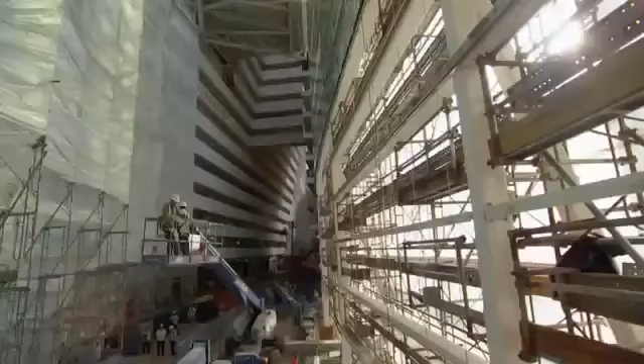It's the country's first casino, 3 skyscrapers covering 9 million square feet, and topped off by an engineering masterpiece, the first ever Sky Park. Longer than 3 football fields, with gardens, swimming pools, and restaurants, all higher than the Seattle Space Needle. We're actually in the pool right now. We're in the pool. This is the view from the pool. Wow. It's pretty spectacular. That is amazing.

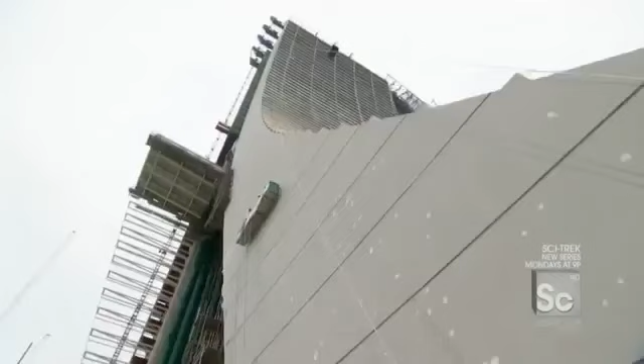To finish it, crews must perform some of the highest and heaviest lifts ever attempted. I mean, you're putting a piece of steelwork the size of an aircraft carrier on top of 3 towers. Tackle one of the largest paint jobs on the planet. You would never do this in America. And erect one of the longest cantilevers in the world. 200 feet out over nothing. Oh my God, that's enormous.

I'm in Singapore, a tiny island nation with less than 5 million residents. In fact, the entire country is smaller than all of New York City. Located at the southern tip of the Malay Peninsula in Southeast Asia, the main island of Singapore is both a city and a country, one of the most densely populated in the world.

Culturally speaking, it's a somewhat strict and buttoned-up environment. Chewing gum? Against the law. Insensitive behavior is punishable by fine. And if you're caught vandalizing a building, you quite literally get hit with a stick. But despite this conservative cultural backdrop, Singapore is attempting to reinvent its image by doing something totally surprising. They're going to open a massive casino.

With no natural resources of its own, Singapore is risking $5.5 billion in hopes of cashing in on the gambling boom exploding across Asia. It's a pretty significant gamble because for Singapore, you've never had gaming before at this scale. You've never had a resort at this scale. Yes. You're taking a kind of a major leap. Yes, it's certainly a transformational project for Singapore. Where you hope to actually not just double, but triple the tourism receipts. That's big.

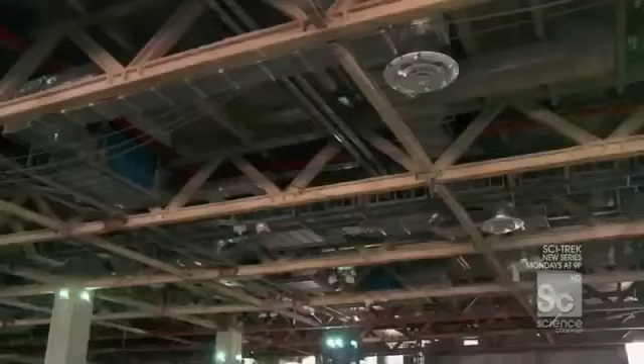The centerpiece of this giant transformation, the Marina Bay Sands. One of the biggest and most expensive casino complexes in the world. Unlike any hotel and casino ever built. Rather than just being a traditional hotel and casino that we might find in Vegas, instead, we have a museum, theaters, retail, a casino, a massive convention center, 3 incredible hotels, and all of that capped by the first ever Sky Park. That is absolutely right. The Sky Park on the very top will become the icon of Singapore, we think.

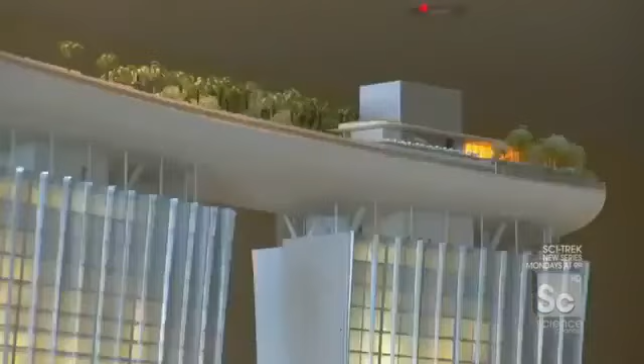In a move that has never been done before, world-famous architect Moshe Safdie put a park across the top of 3 massive skyscrapers. An 1,100-foot-long urban oasis with tropical gardens and one of the longest swimming pools on Earth. All of it perched 55 stories above the ground.

So, Brendan, how do you describe a Sky Park to people? I mean, it's just a fantastic structure. I've never seen anything like it. There's 3 55-story towers, and you're putting a piece of steelwork the size of an aircraft carrier on top of it. So it's quite a feat. And there's a park up there. There is. Well, there's more than that. There's observation decks and swimming pools and restaurants and all sorts of things. So it'll be a little city in itself.

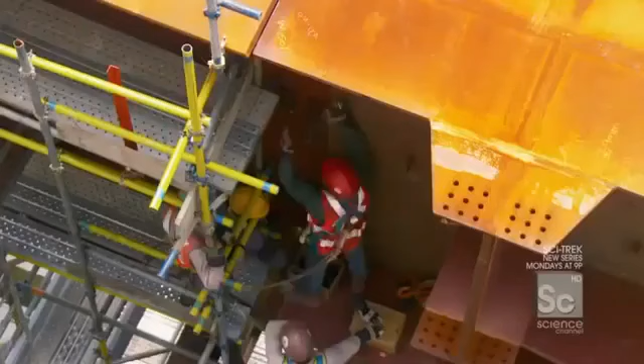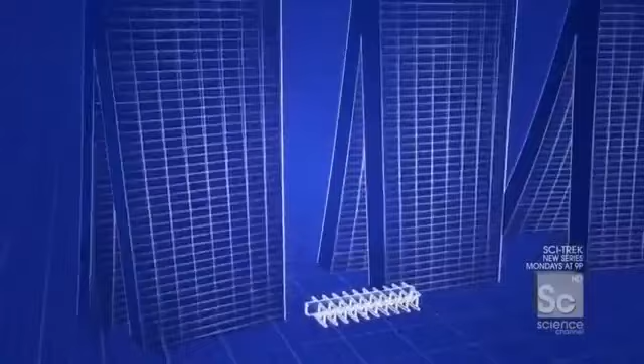The biggest challenge for builders, lifting 7,000 tons of steel, which is more than the main span of the Brooklyn Bridge, on top of 3 650-foot-tall buildings. To get it up there, the team divided the structure into 14 large but more manageable segments. 6 form the bridges connecting the towers, and the other 8 make up the observation deck, which sticks out 218 feet from the end. And right now, crews are about to lift the second-to-last bridge segment, a massive 350-ton piece that will hang between towers 2 and 3.

It's a little after 7 p.m., and on most job sites, it'd be quitting time, right? Folks would be going home. But here in Singapore, we're about to begin one of the most critical lifts in the entire project. That bridge segment right there, an over 350-ton chunk of steel, is about to get lifted up over 650 feet in the air.

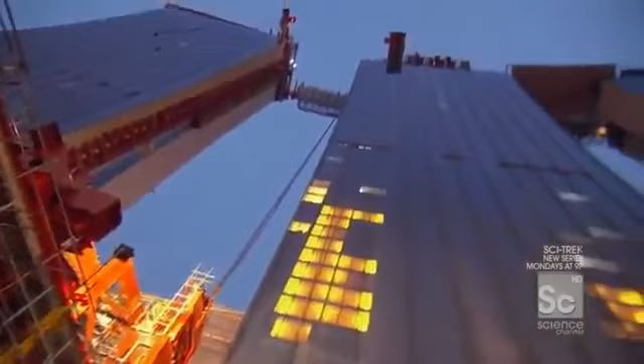I mean, you know, in principle, this sounds crazy, right? Yes. I mean, we're actually taking a bridge, lifting it up, and putting it on top of 2 skyscrapers. Yes. This has never been done. Never done. So, I mean, you got to be a little bit nervous to get this thing up. Oh, definitely. Yeah. We have to get it right.

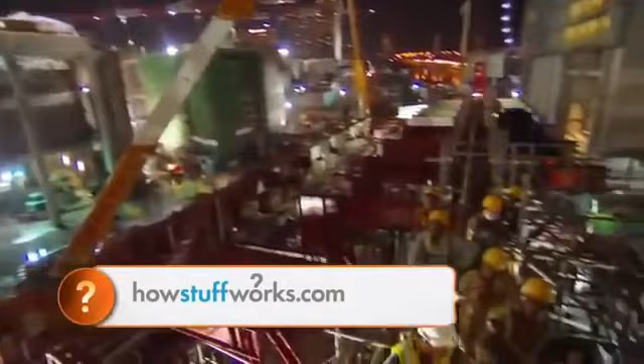Lifting this piece will take some of the strongest hoisting cables ever designed. Going up? All right, Solomon, up here? Yep. They get attached to the very top of the segment, 5 stories up. All right. And now, at long last, I'm on the top of the whole bridge segment, and you really get a sense of its length, because look at that. It spans all the way out between 2 full towers over 150 feet long.

And here, this is what it's all about. This is the shackle coming down over 600 feet up. And to really get that point, come here, check this out. Look at the amount of bound cables inside of this thing. Just the density. It's 2 of these shackles, one on this side, one on that side. We're gonna lift up over 350 tons of steel. All right, you call the man upstairs.

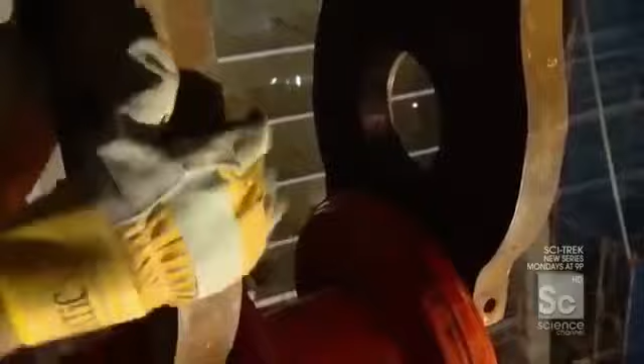An operator from the top of the sky park lowers the shackle down. There she comes, there it is, here it is. Okay, 960 mm. It has to line up within 1/10 of an inch for this 150-pound anchor pin to fit through. Oh no. Stuck. Push. Fight, come on, shake it a little bit. Hammer! Give it to me, Poppy. Stuck here. You ready? Here I come.

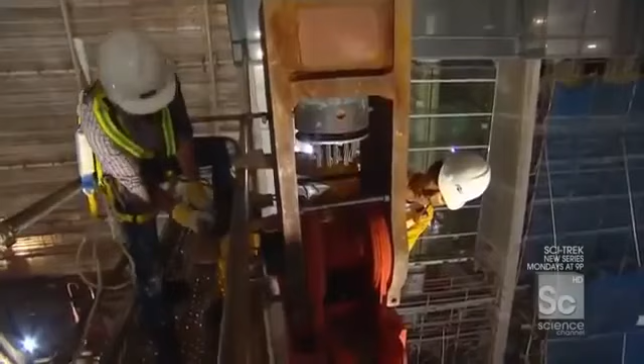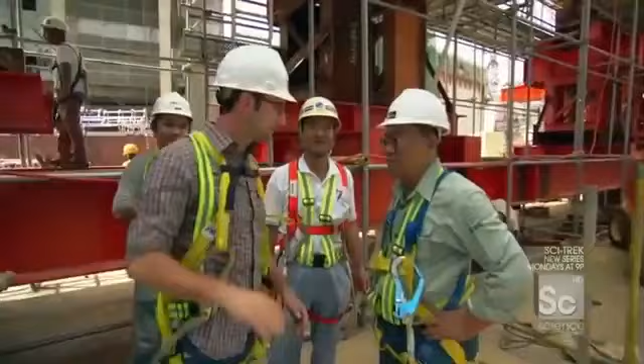Once the pins are pounded into place and the shackles are connected, there is one final step to make sure that the load is secure. Woo! Overnight, crews test the connections for 12 hours by hanging the segment just 4 inches above the support. If everything looks good, it is ready to go up. Okay, Solomon, she's floating. Good. 4 inches off the ground. Ready for the lift? Yes.

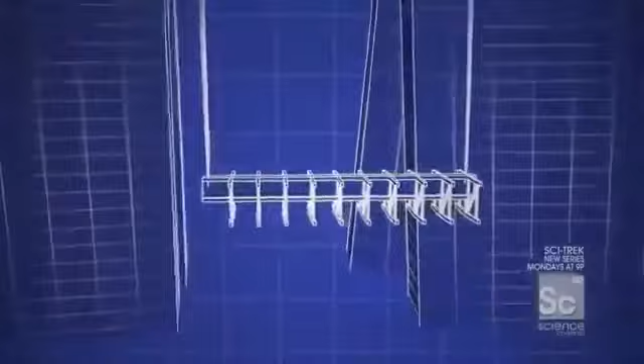How's the wind? If you can see, it is swinging. And if it swings, it might hit the building. So when the lift begins, the concern is in a strong wind, like a pendulum, it could move and actually hit the building. Yes. It's that close to the building? It is very close to the building. Because of the curvature of the towers, this piece must pass within 10 feet of 2 glass skyscrapers on its way up. Any wind over 5 miles per hour is enough to call off the lift. So are we good? Are we ready? Yeah, good. So it's now okay to go.

Okay, I'm ready. Typically, crews would use tower cranes for heavy lifts, but this segment far exceeds their capacity. So instead, engineers are borrowing the technology from a different kind of construction, bridge building. Even the most powerful tower crane can lift about 20 tons. This thing weighs over 360, not an option. So they went with something called a strand jack. And to understand how it works, imagine 2 hands or clamps holding a rope. One hand locks the rope, the other brings the rope up, grabs the rope, goes back for more, brings up more rope, and so on and so forth.

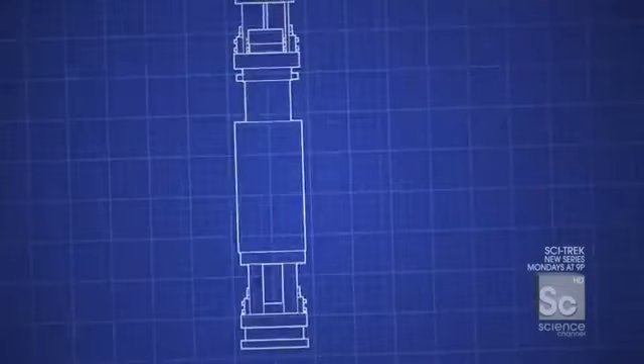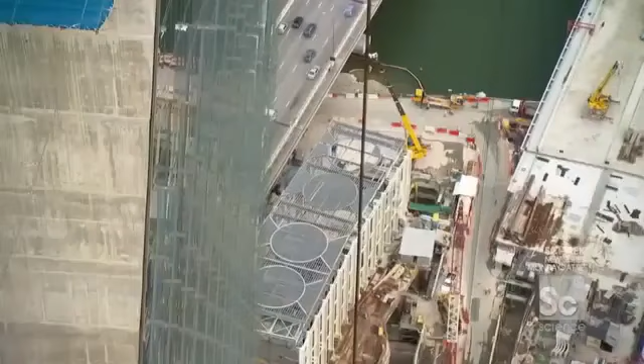Strand jacks work on simple hydraulics. A bundle of 22 half-inch diameter cables passes through 2 clamps. The top clamp grips the strands and moves up almost 2 feet. Then, the bottom clamp locks the cables in place while the top moves back down for the next pull-up. It takes 2 enormous strand jacks to lift this segment, one on each tower. Combined, they could lift the Statue of Liberty. It's the first time that this technology has been used to make lifts this heavy from the top of a skyscraper.

Tony? Danny. Welcome, Danny. Good to meet you. Good to meet you.

Tony, where am I standing right now? Well, you're on the Sky Park. So this is kind of where the action is. This is where the pool is. Yep. Right where we are now is the second swimming pool. We're actually in the pool right now. We're in the pool. This is the view from the pool. Oh my God. People will be able to swim out to the edge of the pool. Yep. And literally, there'll be no edge, right? It'll be an infinity edge looking out over Singapore. Wow. It's pretty spectacular. That is amazing.

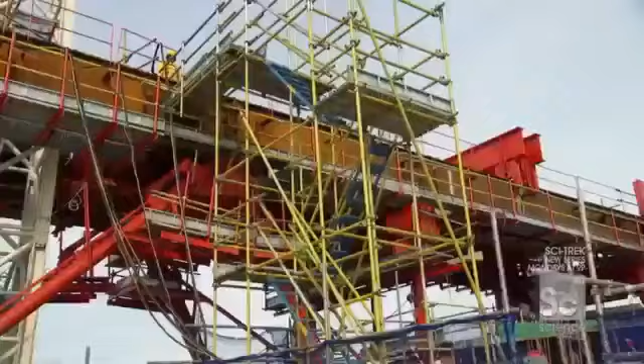And what's making all of this happen is this really just nasty looking beam. That's right. So this enormous frame is supporting the strand jacking units. Now, can we actually head up top to the strand jack? Yeah, we can. Let's go this way. The strand jack sits on a temporary support structure that extends 30 feet out from the side of the tower. So Tony, where we're walking right now, we're actually leaving the skyscraper below us and now heading out. We've just walked off the edge of the building.

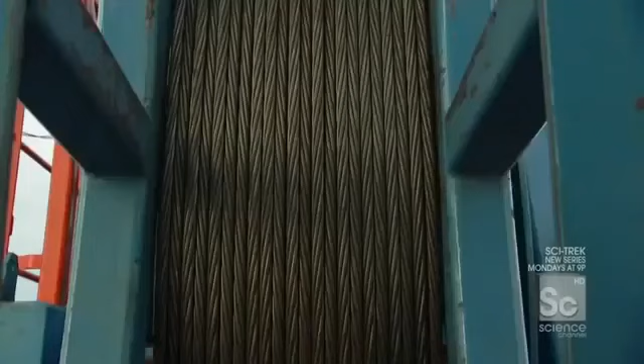So we're now standing perched out. There's no more skyscraper below us right now. There's no building below us. It's awkward. It takes almost 30,000 feet of cables to raise the segment, enough to cross the width of Manhattan. And if any of them get tangled, workers cannot lower the piece back down. So one of the most critical jobs on the site falls to the cable manning crew here at the highest point of the sky park.

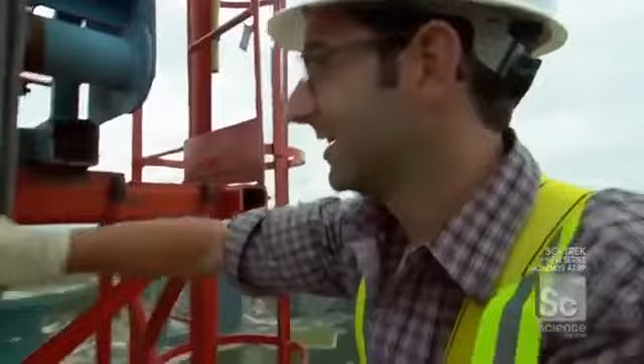Okay, so I am now standing at the very top of the strand jack. And you know that because right here, this is it. This is the top of the cables. And what we're about to do, every 30 strokes, they stop everything, clamp the lift, and spray some lubricant inside to make sure everything moves real freely. Unfortunately, I'm getting tasked with that role right now, so what do you got, some WD-40 we're doing this with? Look at this guy. How is this the most low-tech thing in the world?

Okay, so now what we've done is we've taken the collar off, we've lowered the jack down, now we've exposed the cables to give us good access for some good greasing. Okay, Romley, how do you grease it up? Spray and pull out. Put in, spray, pull out. Go in, spray, pull out.

You know, it's sort of humbling to have to climb up to this point, to have that behind you, to have to take a spray can like this, stick in, spray, pull out. Stick in, spray, pull out. Go in. These guys have to grease these cables once every hour for the entire night to get this segment up the final 500 feet to the very top of the sky park.

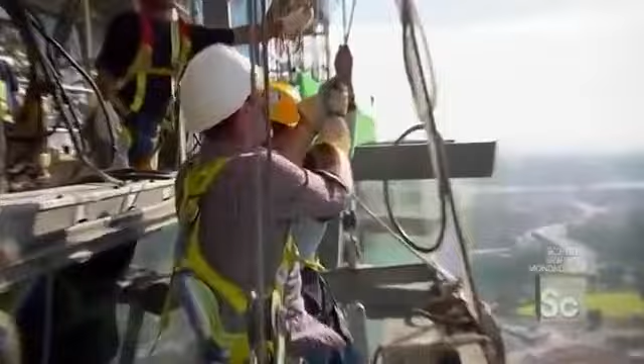Coming up, a one-of-a-kind solution to fight Singapore's intense sun puts up a fight of its own. Hang on. Whoa. I'm gonna pull you right outside of the basket.

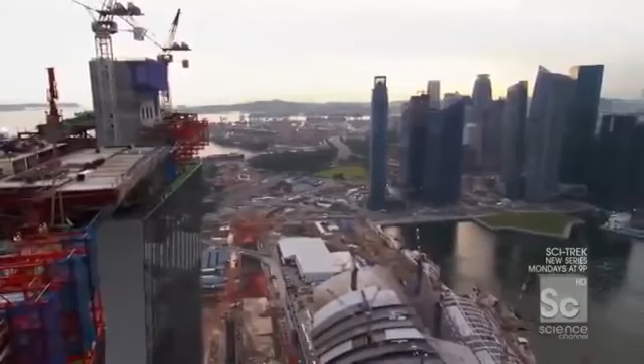Singapore is just 14 miles long. And with literally nowhere else to expand, this tiny island is increasing its footprint by actually filling in the sea, creating almost 1,000 acres of land on which to build an entirely new downtown. So tell me something. If I were standing here 5 years ago, what would I have seen there? Well, 5 years ago, you wouldn't see the floating gallery, you wouldn't see the wheel, you wouldn't see Marina Bay Sands, neither would you see the financial center. So this is a radically different skyline in just 5 years' time.

Yes. Singapore's evolution involved 30 years of land reclamation, followed by 5 years of construction, all culminating with the Marina Bay Sands. So 5 years ago, this would have been called the old downtown of Singapore. Yeah. And now with the Marina Bay Sands completed, this becomes the new downtown. Yes, absolutely.

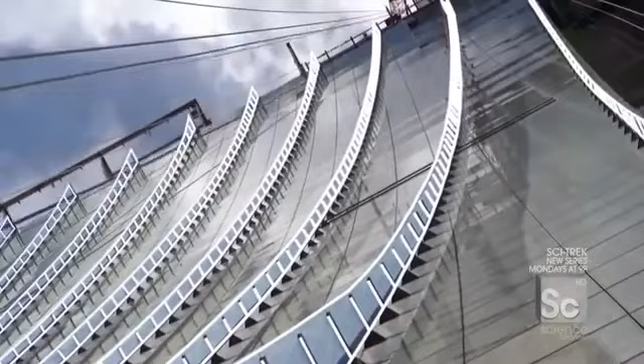The Marina Bay Sands 3 hotel towers will offer guests phenomenal views of Singapore's new downtown. But they also had to be a stunning centerpiece for the city's redevelopment. So, to define their curved silhouette, the architect clad the tower facades with 1,900 glass fins, which also perform a key functional role for the building.

The western face of the towers gets the most intense afternoon sun, so when the light hits the fins, they actually deflect the sun's rays, casting a shadow that reduces the heat on the hotel rooms by 20%, while still enabling clear views of the bay. But this distinctive design feature is also one of the most difficult to install.

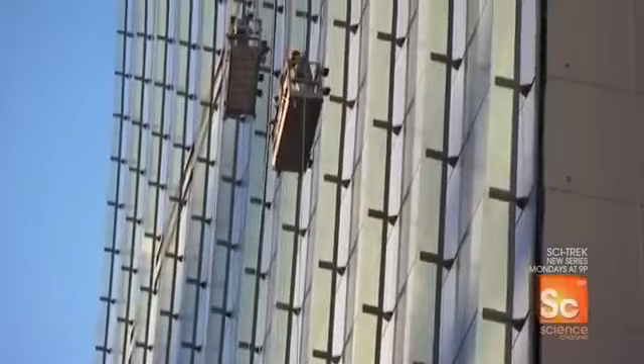I think today is gonna be one of those days where I go and do something that I kind of think I shouldn't do, but in the name of really understanding how it is they build this building, we're gonna do it anyway. I'm gonna take you in a gondola up the side of a building, almost 600 feet to install glass fins. And the guys who are going to help me do it are right here.

Terry? Hi, Danny. Good to see you. David, how are you? Danny, good. Not bad. What are we up to, fellas?

We're actually going up to the top. Basically, we're going to install the last fins to Tower 1. And these fins are actually hanging perpendicular from the facade of the building. That's correct. Each fin is 10 feet tall and weighs 400 pounds. They're hung in straight vertical lines, protruding up to 4 feet from the side of the tower.

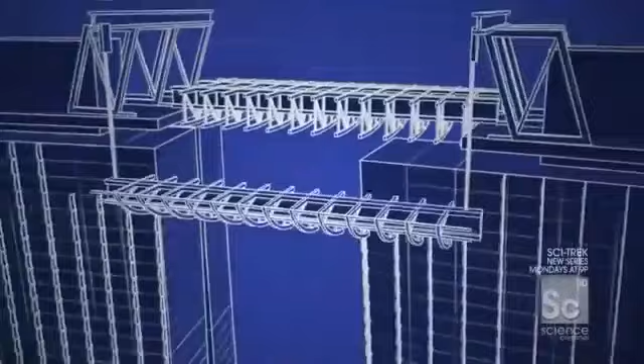Because the facade actually curves outward 5 degrees at the top, there would not be enough clearance for the Sky Park lift to pass by. So 12 fins in the upper corners of each tower were left off until now. So this is it. We are closing up the curtain wall of Tower 1. Yes. Big milestone. Big milestone.

All right. Take me over to my maker. Let's do this. Okay. No problem. Lead the way.

Terry's crew installed the fins from a 6-foot-long gondola hanging off the side of the building. Okay. We doing? All right. You gotta be kidding me. It's basically the size of a bathtub, swinging from 2 sets of 650-foot-long cables tied to the tower. Show me the safety, please. It's so precarious that I'm going to be tied to a separate cable in case the main cable fails.

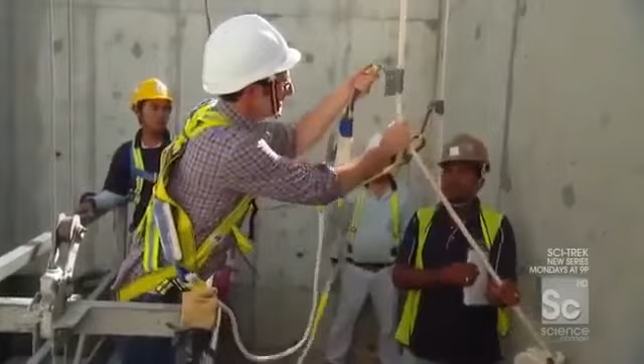Okay, thing is on. This goes up. That's in the case of dying. 1 carabiner, 2 carabiner, 3, chin strap, pants. I mean, there's really nothing else you need. Just gonna hang some glass with my boy Jay. 600 feet in the air.

Right, man? Give me some skin. Buddy? We're gonna be great.

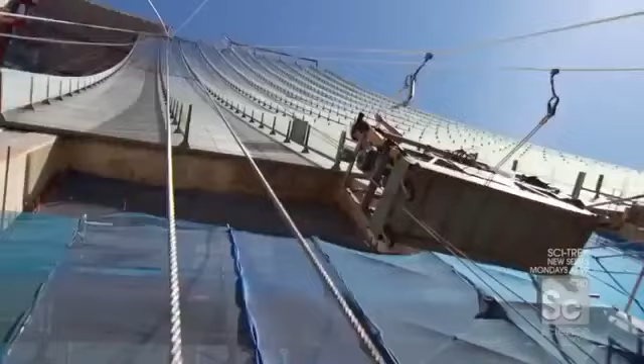Yeah, here we go. The gondola travels at just 0.2 miles per hour. Here I come. Moving along, just moving along. So it'll take me more than a half hour to reach the top. Oh my God. This gondola looks like it was built by the Unabomber. Sometimes I don't really feel like I give you exactly what's going on for me right now, so I want to give you just a little taste of what I'm seeing.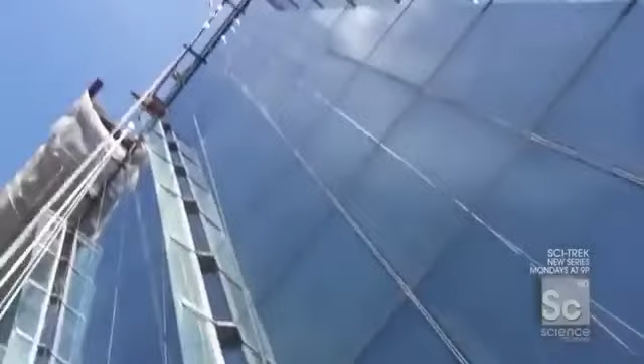There is a fantastic view of Singapore. There is Jay, my chatty friend. And there is not a good situation. All right, we're almost near the top, and you can tell because the building is beginning to bend back on itself and get closer to me. Right there, check it out, we're about 80 feet from the top of the building, and if you look up, you can actually see the missing glass panel.

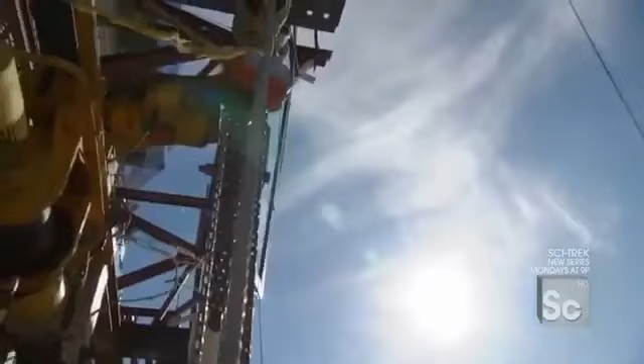And as I approach the top of the skyscraper, they're prepping the glass. There she is. Oh, the wind is really moving up here. That looks safe. Hey, fellas! How are you? Good. Nice weather, huh? Okay, this is something you don't see every day. I'm outside a skyscraper, and right here, right now, I am touching the top of the building. We are on top of the skyscraper. All right, who's ready to install some fins?

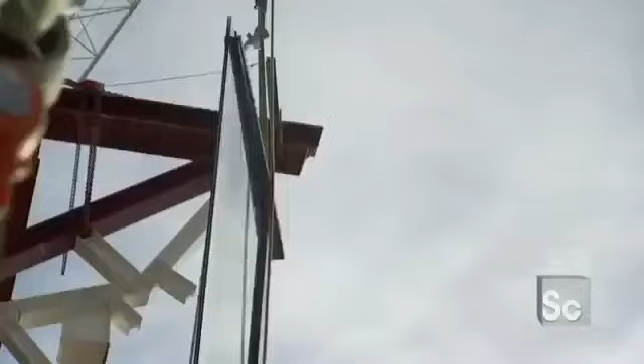Each fin is a custom-built pane of solid glass. I got the line. Hang on. Focus. On a calm day, they are extremely difficult to manage. The wind is blowing this thing out. Give me a hand. But on a day with even a light wind, the task is almost impossible. Hang on. You feel like it's gonna pull you right outside of the basket. Hang on, give me some help. I'm not kidding. Every time you get a little gust of wind, I can feel my feet getting pulled a little bit. There she is, slowing down.

It's basically like a big double laminated glass sail. And if the wind catches it, I mean, it moves. Okay, let it come down a little bit more. The fin can swing up to 20 feet while attached to the tower crane. Coming this way. Okay. Watch out. Someone help him. That's just too dangerous for the final installation. So the team has to transfer it to a more precise chain block mid-air.

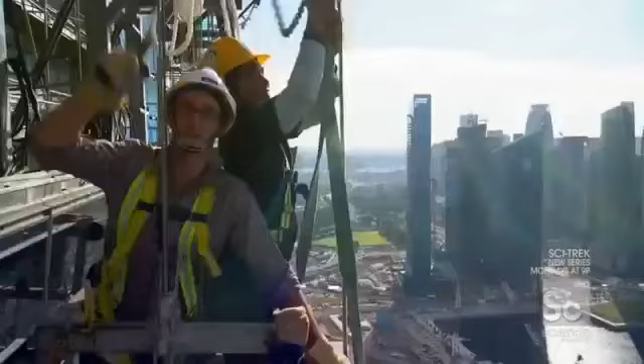Whoa. Hold that side, please. All right. So this is it. What we're doing right now is essentially taking the load from the crane and transferring it to that chain block. Are we in? Okay, I think we're set. This is another one of these moments in my life where I say to myself as an architect, did you really need the fins? Did you have to have fins? Building would have been fine, you know?

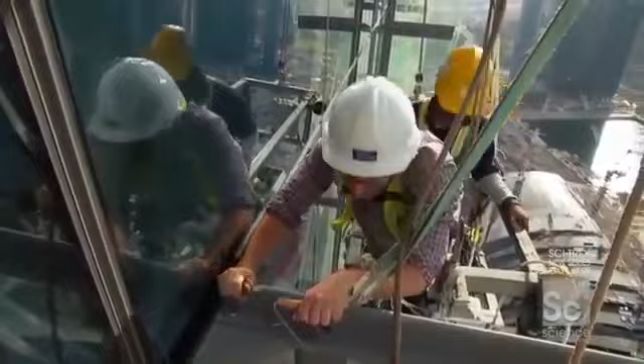Okay, gondola down. The fins are designed to clip into each other at the bottom. I need you now, Jay. But here, at the very top connection on the highest fin, it gets locked to the building with bolts. Oh boy, this is gonna be a nasty one. Okay, Jay. 4 bolts. Give me your thoughts. 1, 2, 3, 4, are we good? Okay.

Are we good? Come here, bring it in, I need some. Come on, give me it. There it is. Okay. That's right. Whew. 4 bolts, locked in, lined up. We, Jay, are done. Can we go home? Home, that much he understands. Let's get out of here.

Up next, building one of the longest and highest cantilevers in the world, jutting out more than 200 feet over nothing. Oh my God, that's enormous.

Singapore's new Sky Park is the first of its kind. A steel structure longer than an aircraft carrier, on top of 3 skyscrapers taller than the Seattle Space Needle. And on the northern end, the architect took this innovation one step further, creating the longest cantilevered observation deck in the world. It's the biggest and heaviest section of the Sky Park, and it hangs out 200 feet over thin air.

When it's done, the Sky Park is going to look to the eye like one 1,100-foot long continuous element. But the reality is, it's actually made up of 2 very different structural conditions. Bridges on the one hand, and something called a cantilever on the other. Spanning between towers 1 and 2 and towers 2 and 3 are 2 bridges, basically acting like tabletops. The force goes from the bridge, transfers into the towers, and down something called shear walls into the foundation.

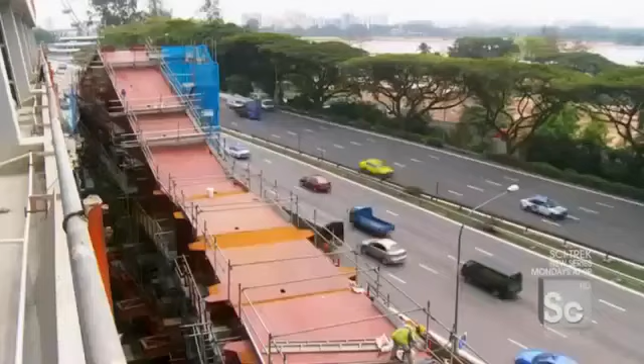Now the cantilever is a different story. A cantilever, by definition, is a load supported on only one side. So what you have here is a 218-foot-long span, almost like a diving board, perched out over nothing. Intuitively, that load wants to just twist off the building. So to keep it down, they've put not 1, but 2 700-ton backspans holding down the cantilever. The 2 backspans weigh as much as a fully loaded freight train.

But that weight is critical to balancing out the cantilever, which will jut out longer than a 747 from the end of Tower 3. There are 860 tons of structural steel that make up the 218-foot-long enormous cantilever. It is so big that they actually assemble the entire unit here on the ground before sending it all the way up there. The cantilever is just too big to be raised in one single lift.

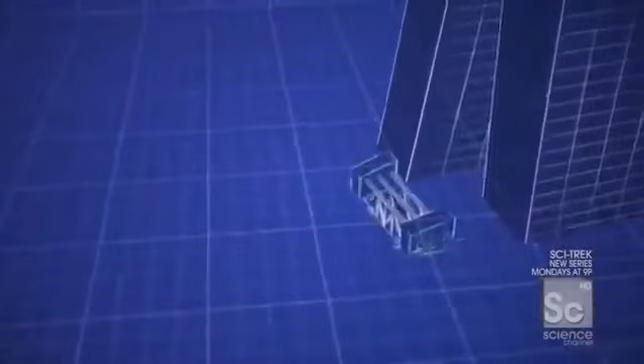Instead, it's divided into 6 segments. Once they're 650 feet in the air, crews will have just 1 shot to fit them together. So before the segments can be lifted, they're assembled on the ground to be sure that each connection will fit perfectly. So these pieces behind me represent the very final pieces of the cantilever to be assembled here on the ground. So once we get this and this bolted onto that massive cantilever, the lifts can begin.

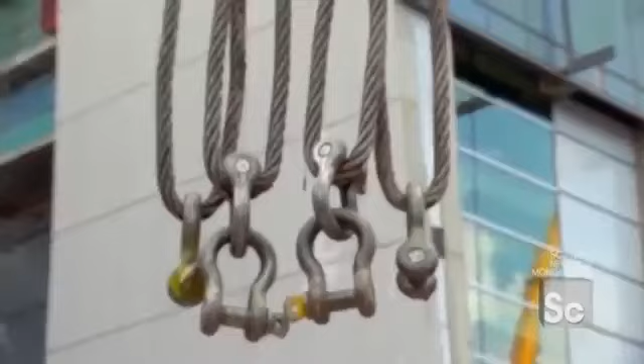So the crane is now setting the shackles up. We're going to go on top of the piece to connect it. The piece we're attaching today is 12 feet tall.

Come on, jungle gym style, baby.

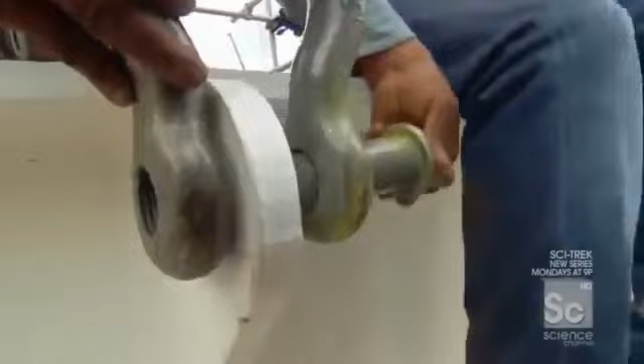And it weighs 30 tons, as much as 2 Mack trucks. A crane will lift it over to the rest of the cantilever using 4 extra large shackles. So Viram's now tightening up this shackle. So shackle number 1, 2, 3, and 4 are all connected. The next step is to take the piece that I'm standing on, lift it up, and extend that cantilever another 50 feet.

You ready? Knuckles? Knuckles! All right. You ready, Knuckle Man? Knuckle Monster, you got it. Nux Magoo, come over here for that. Bang! We are ready to go. Okay, I'm ready.

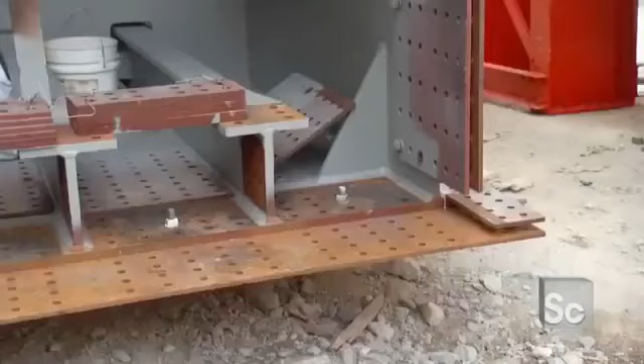So what they've done is they've just put a bit of tension in the line, lift the piece just off the ground to make sure the shackles look nice, and they know where the center of gravity is. So are we good? Are we ready? Yeah. All right, let's go. She's off. Out of our hands. Now the crane's got her. He's gonna swing her all the way around this way.

What's really worth noting is as you look at this thing, this massive floating piece of steel, it's but a small fraction of the entire cantilever that's going up there. Even with 1.5 million pounds of steel, this cantilever will still be susceptible to the problem facing all structures: movement. All buildings, all bridges, even all cantilevers have a natural frequency, meaning they move ever so slightly.

Now, if the movement of wind, or the movement of people even, starts to align with that building's movement, it can combine and collaborate and literally shake a building. So when the engineers were designing the cantilever, they had to be concerned with not just how many people stood on the edge, but also how they were moving.

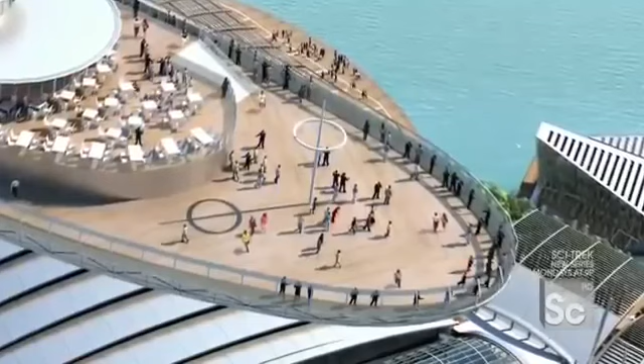This cantilever has been designed to withstand wind and earthquakes, but its most dangerous threat could come at the hands of a DJ. Yeah, it's thousands of tons of structure up there, so you and me jumping about, it's not going to do very much. But if you get 100, 200 people all jumping up and down at the same frequency, then it can actually excite the cantilever and you actually start to feel it. Right. It would take hundreds of people dancing to the exact same motion. Yes. Like the Macarena. Yes, that's right.

And believe it or not, our dynamics engineers have iPods with thousands of songs in them. No way. That actually have the frequencies of all of these songs. So, once we actually find out what the frequency is, in theory, you can say you can dance the Macarena, but you can't dance the bus stop or whatever else. That can't be true. Is that true? Yeah, that's right. So you're telling me that some engineer is doing intense load calculations and solving the fact that this thing can take the electric slide, but it cannot take the achy breaky heart. And they know that in advance and it's been designed.

More or less, yeah. Imagine the party, like the party's going great, a big wedding, and all of a sudden someone puts on the Macarena and is like, no!

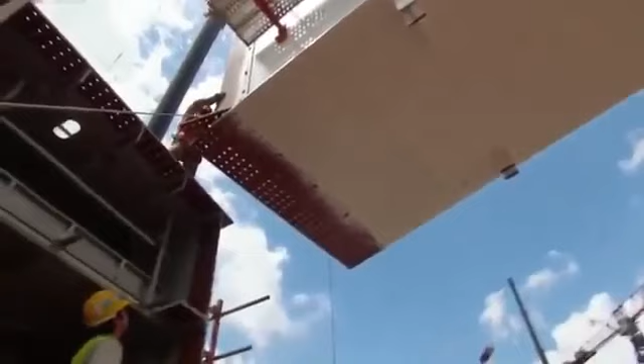Now that the piece has made its way over to the rest of the cantilever, the next major challenge is lining this giant segment up for attachment. So the piece is now literally sitting right on top of my head. And just imagine, on top of this incredible white long piece of steel will soon be a garden, a pool, and a dance party.

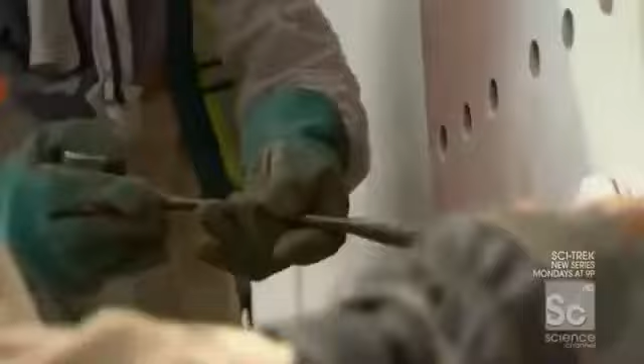Slowly guide it down. The thing incredible about lifts like these is that the first 99% happens almost instantly, and now it gets down to the details. Pushing it, pulling it a matter of inches, get all of these holes lined up to get the bolts in and take the load off the crane. Once the piece is in place, the crews have to line up all 1,500 bolt holes. There are so many bolt holes. They'll connect about a third of them here on the ground to make sure everything fits together before liftoff, because there are no second chances once this piece is airborne.

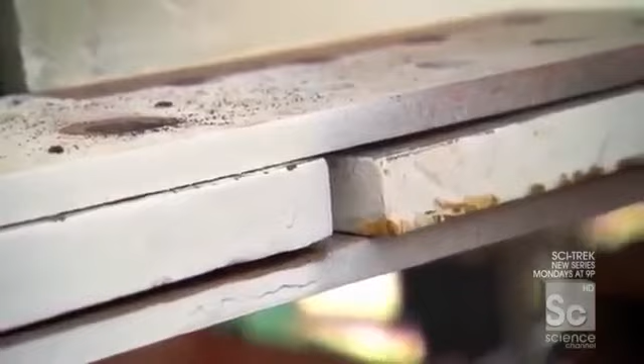So this is how one fits into the next piece right here. You have these two plates on top, and they're sliding over top of the previous cantilever piece. Here it is, it's coming in, it's coming in. Once she's there, we'll put this pin in to lock the piece together so we can release the crane and move on. About 2 inches. Just about there, just about there. Okay? Yeah. Use the hammer. The pin secures this new piece to the rest of the cantilever, so bolting can begin.

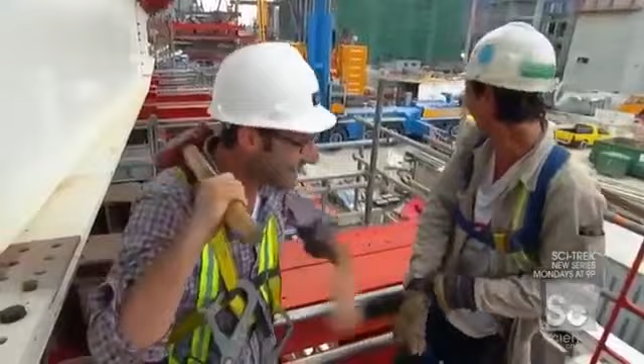I never hit it every time, man. I never do that. Usually I break a finger and knock some steel off the thing and almost break the hammer most of the time. I knocked the crap out of that thing.

Well, as you can see, the piece is in its final location. And now from where I'm standing, I think you can really get what this thing is. An 860-ton, 218-foot long steel diving board that's going to be perched out over 600 feet in the air. And coming up, a hotel like no other, with a lobby bigger than a cruise ship wrapped in glass. This is probably one of the most spectacular corridors I've ever seen.

But first, what is the maximum number of people the Sky Park can safely hold at one time? The answer after the break. The answer to the trivia question. 3,900 people can safely be on top of the Sky Park, but only 900 of them can be on the cantilever.

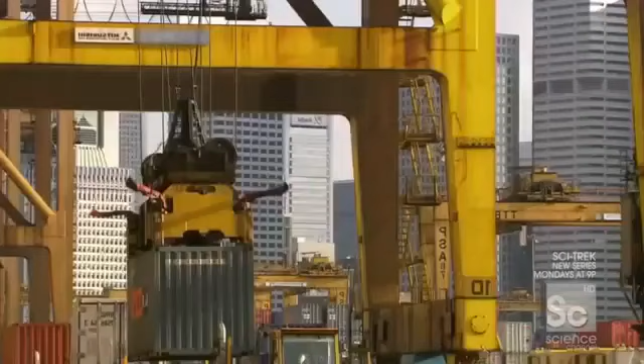Singapore is the gateway to Southeast Asia. And for the past century, its economy has depended on its location as one of the world's busiest shipping ports. But this city is in the midst of a makeover. When the Marina Bay Sands opens later this year, Singapore will instantly become one of the largest gaming markets in the world, putting it in the same league as Las Vegas, Atlantic City, and Macau.

When Macau opened their casinos, they looked to the past for inspiration. You have the Venetian in Las Vegas, you have the Venetian in Macau. Carbon copy, only bigger. But here in Singapore, a country so focused on image, they didn't want to mimic what came before them, but instead, they're trying to literally reinvent the idea of a hotel casino.

The difference comes down to design. The typical casino model involves a giant gaming floor with a flashy attraction out front and a hotel connected in the back. But with the Marina Bay Sands, the architect actually separated the hotel from the casino and relocated the attraction on top in the form of a sky park.

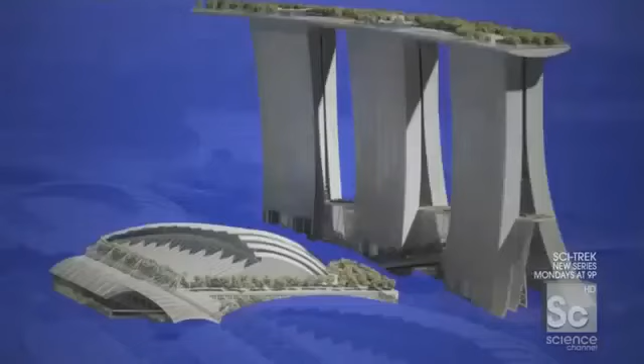From my perspective, when I think of a hotel and a casino, I think of a ginormous casino, a tall hotel in the back, and basically not being able to check in and go to my room without passing a blackjack table or a slot machine. This doesn't follow that model. It does not. Singapore has a very particular vision as to how they want the gaming component to work. What we built here was not something that was casino focused. It was all of this. So the casino is part of something far grander. And key to making that happen is not just building a set of normal, typical expected structures, but instead to do something like that. Correct.

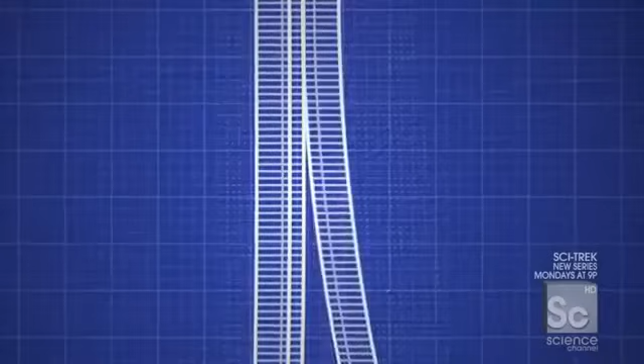This revolutionary design carries over to the hotel towers themselves. To create a hotel lobby like nothing before, the architect actually split each building apart for the bottom floors, creating one long tapered space linking the three separate towers together. The three hotel towers are all connected by one long continuous atrium, and that atrium is covered in glass. These massive 9-foot-long panels that we're about to take from down here and install right up there.

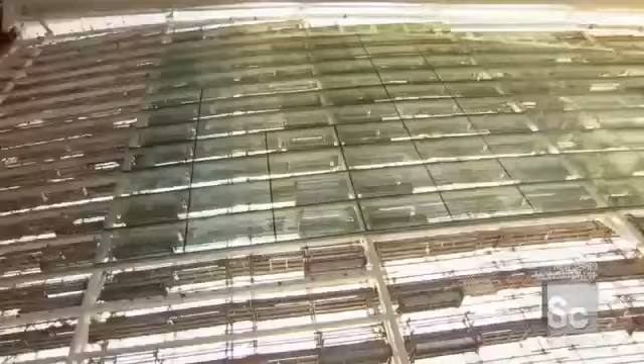3,500 individual panels will hang throughout the atrium, transforming this space into one 850-foot-long tube of daylight. So Terry, once the scaffolding comes down behind that glass, this whole chamber is going to be just awash in light. Yes, that's correct. And these spaces literally link all three hotel towers and let you look from one end of the building all the way down to the far end.

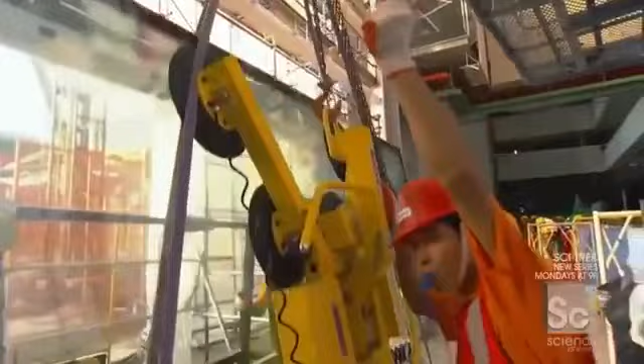That's correct. So this is more than just a kind of connective hallway from one hotel to the next. It's not just a corridor. This is not a corridor. No. And if it is, it's probably one of the most spectacular corridors I've ever seen. Correct. The atrium glass is a key part of the tower design, but it also plays an important functional role in sealing up the building.

With hotel guests arriving in just 6 months, the delicate job of hanging all that glass needs to happen quickly. Now, why is it so important to get the glass on the atrium and button up the facade? The vital bit is we actually have to make the building watertight as quickly as possible to enable all the final finishes to commence on the inside. So all the sheetrocking, carpeting, wallpaper, painting, that sort of stuff can't happen if moisture can still penetrate the building.

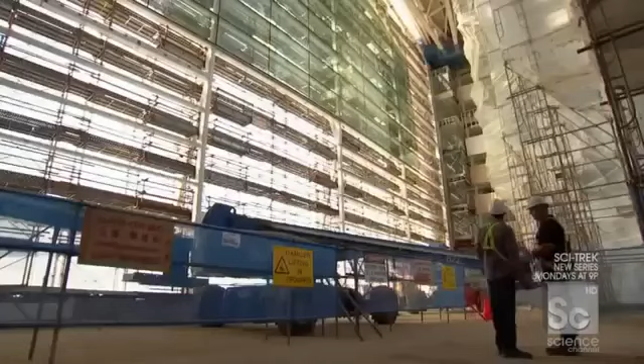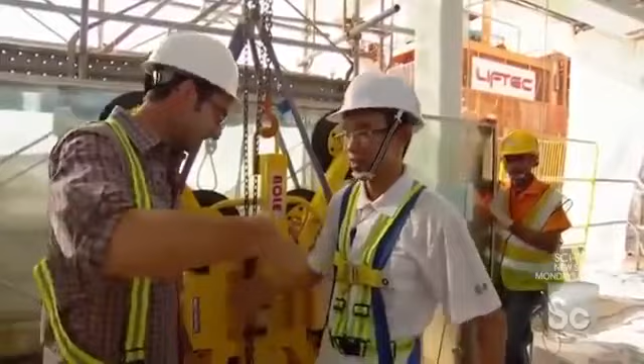Y? Nice to meet you. Nice to meet you. So Y, you're one of the installers? Yes. And you've been installing glass how long? Over 10 years. My experience is over 10 years. Your experience is over 10 years. My experience is almost 10 minutes. 10 minutes. So this is going to be a very good team. You and me together. Master and apprentice. Are you ready? I am ready. Let's get there. Let's do this. Let's hang some glass. Y and Danny? Why? Because they said so.

Let's do it, Y. We're installing the third highest panel in this section of the atrium, more than 100 feet from the ground. Safety harness? I want you to be safe the whole time. In addition to Y and me, it'll take 10 other workers to install this 550-pound panel. The crew on the ground applies suction cups to the glass and then sends it up on an electric hoist to meet the crew in the air.

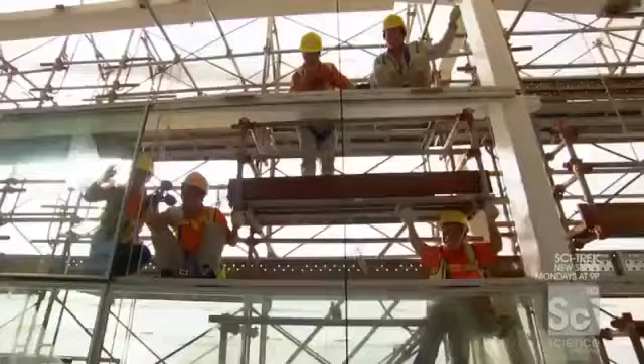Here it comes, check it out. And waiting for me, hello my brothers! You guys ready to rock and roll with myself and Y? Ready? The big team. This is it. This is the Singapore Glass Stallions.

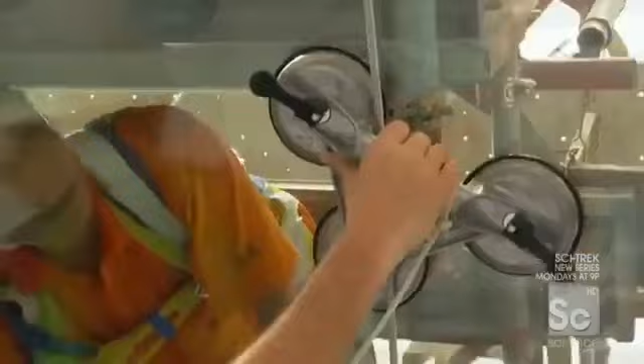All right, here it comes. It's a big piece of glass, huh? Yes. What are we doing? What's the first step? The first step is we need to take off the handle. Yeah. So I'll take off that side, you take off that side? Yeah, take off only the handle. Turn only. Yeah, yes. All right, I don't want to drop it though. Don't want to drop it.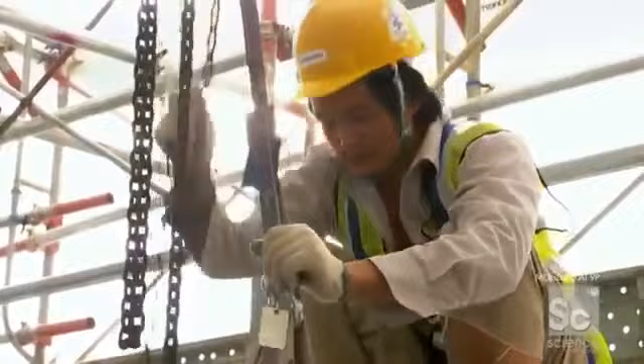Okay. The panel is supported by a backup system of smaller suction cups to help guide the piece on its way. Okay. Oh, okay. Yeah, okay, guys. It's okay. Let go? No, it's too scary. I'm not gonna do it. Okay, I did it. And just like the glass fins outside of the towers, we'll finish maneuvering this panel into place with the chain block.

Okay, guys. Okay, so the chain block has lifted the glass panel to just about the height, as you can see, of the previous panel. So the next step is to push it in and get it locked into place on the brackets. Okay, Why? Should we bring her in? Yeah, the last one. The interior work for the hotel cannot get started until all the atrium glass is hung and the lobby is watertight.

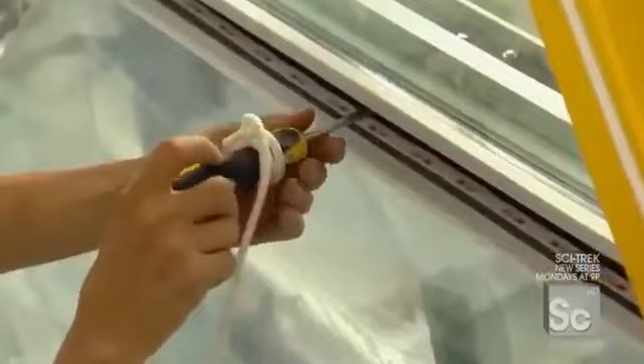I'm pushing, Why. So to speed up that process, 20 attachment brackets come pre-installed on the atrium wall frame. They sit horizontally so the glass can slide into place. There we go. And then we'll turn them vertically to lock the panel to the building. Do I need the screwdriver? No, you use the power tools. I'm old school, Why. Power tools. You make sure all the pressure bars must be tight because the hand power is not standard.

You haven't seen my hand power, Why? Yeah, hand power. Tight, yo. Huh? Check it, Why. You don't trust me, check it. You have a look. That's just good stuff.

Yeah, good. Very good. All right, so all four sides are locked into place, and this glass panel is now fully supported by the building. So therefore, Why, I'm pulling the plug. Suction is coming off. 3, 2, 1. Okay. All right. Very nice. Look at that. Nice, huh?

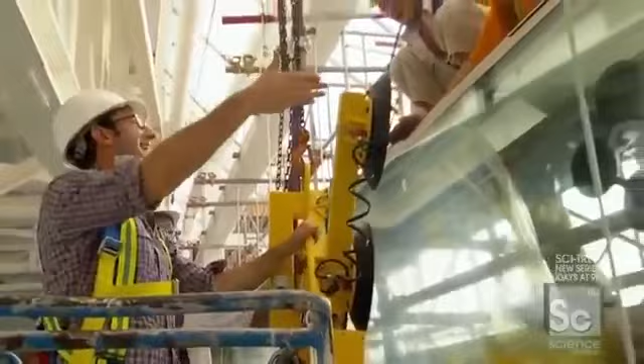Very nice. Why from Malaysia and his team do this 25 times a day. Best partner. And in just 6 months' time, this entire atrium will be covered in glass and shimmering with natural daylight. Okay, it's you and me. Go home. Now, go home. And by go home, I mean hang glass the rest of the day.

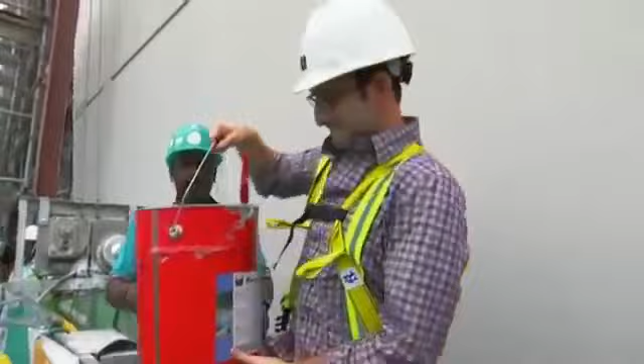Up next, racing to finish one of the largest paint jobs in the world. We're going to use a brush. Yeah, brush. This brush.

After 30 years, Singapore's ambitious downtown redevelopment is nearly complete. Its crown jewel, the $5.5 billion Marina Bay Sands, is due to open in just 6 months. And crews are racing to complete the hotel's complex facade. The glass on the face of the towers is complete, but on the side walls, the concrete remains exposed. So to finish those walls on time, there's another massive job ahead.

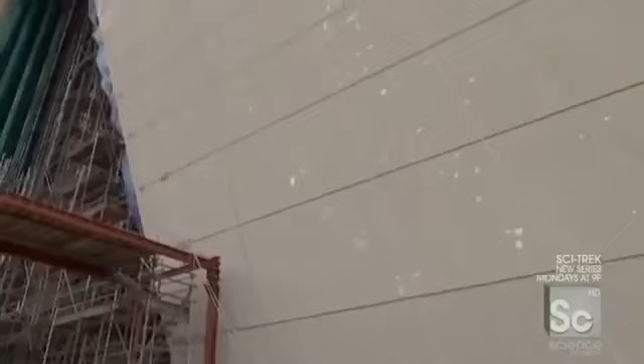When you clad the outside of a skyscraper, typically you cover it in maybe some stone veneer, maybe some glass, or maybe some metal paneling. What you don't do is paint it, right? Because if you've ever painted a fence, every couple of years you have to repaint that fence. But here in Singapore, they're so focused on things being clean, so focused on immaculate maintenance, they're willing to actually paint their buildings. So today, I'm going to do something that you would never see on an American construction site. I'm going to paint a skyscraper.

Crews will have to paint an area about the size of Mount Rushmore. Muti, I'm Danny. This is going to be one of the single largest paint jobs ever attempted. So I got a bucket of paint, and in order to apply the sophisticated skim coat with the technology we're going to use, we're going to use a paintbrush. Really, Muti? Yeah, this brush. It's a small brush, yeah? Yeah, small brush. One small brush.

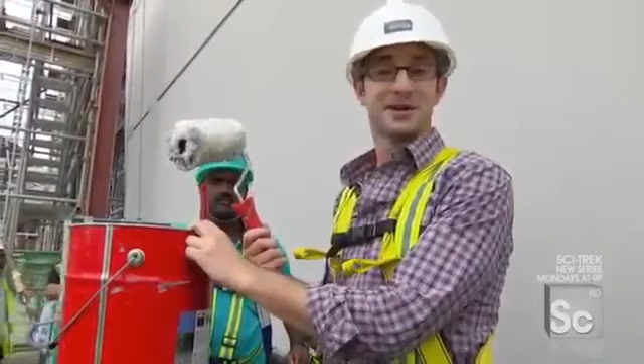Right, and obviously you couldn't do a skyscraper with that little brush. That'd be crazy. So instead, I have a roller, which ought to really expedite the process. Paint me first. All right, well, what more do you need? Muti, yeah. Away we go. Okay.

This wall faces the country's main highway, connecting the airport to downtown. So Muti, you're okay? Heights, no problem? No problem, no problem. And on opening day, with all eyes on Singapore, it's gotta look good. Yeah, okay, so welcome to House Painting 101, Skyscraper Edition. So we're about 200 or so feet in the air. We've reached our cruising altitude in a super, super robust and technologically sophisticated gondola system.

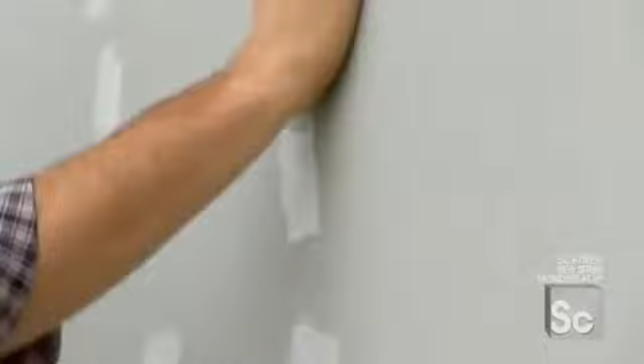And what we have to do is fix this. This wall is a mess, right? Little holes they've patched and filled. We have to have one smooth surface ready to be seen by all of Singapore. Muti, start with the dark gray first, huh? Okay, first. I'm gonna paint within the lines here.

The dark gray lines mark each floor of the tower, so you can still see the floor-to-floor separation from afar, giving a sense of scale to this massive surface. Okay, so now that the gray line has been deepened and darkened, we're gonna start painting the building.

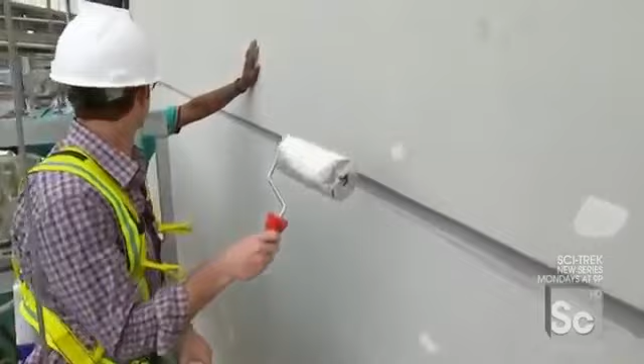In total, Moody and the rest of the crew will use more than 2,200 gallons of paint. Moody, how's it look? Does it look good? Yeah, very nice. Moody's loving it. To cover all the tower shear walls in time for opening day. And this project cannot afford delays. Because every month the casino is not open, developers give up $100 million in lost revenue. So these crews have been running at top speed since day one.

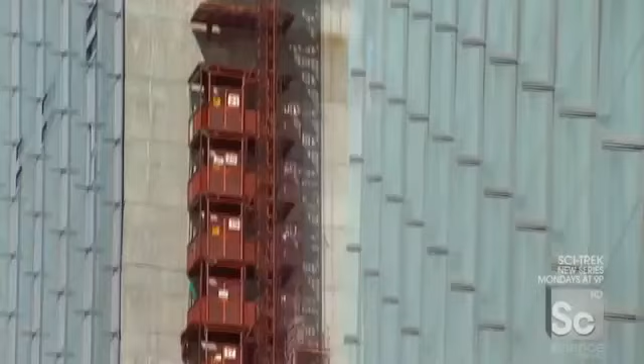So, John, just to put this in perspective for someone who's not used to seeing a project this size, it would take perhaps another country a project this big, this expensive, this complex, as much as 6+ years to build. Yep. And you guys are on target to complete this in 3 years, half the time. Yep. And one of the critical aspects of this project at the moment is getting that Sky Park structure up. So getting the superstructure of that Sky Park done is key to closing up this project and finishing this race. Yeah. But this is going to be a sprint to the finish.

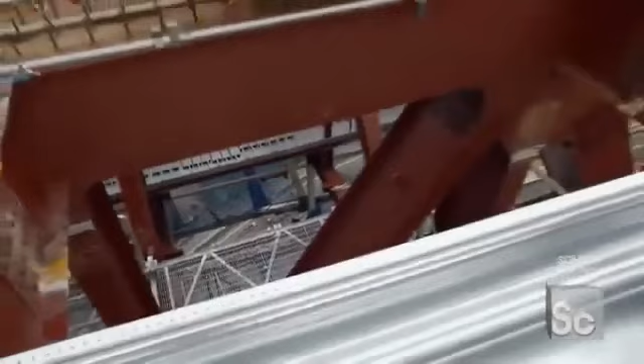Because crews up at the top of the Sky Park have only 6 months left to turn this mess of steel into the world's longest elevated pool deck. This is it. This will be the pool deck, and that will be the pool. But there's a pretty big problem. You go on vacation, you come to the Sky Park, you see this amazing view of Singapore, but then you fall through a hole to your death. Not good fun on the vacation. So Wilson and I are going to cover it with this aluminum decking. Let's cover the holes, my friend.

We're filling in the bridge segments between towers 1 and 2, more than 650 feet up. And there is literally nothing below us but the decking we're about to lay. Oh, I just looked down and I saw a car, and it was so little, and my body was like, wait a minute, what are you doing up there?

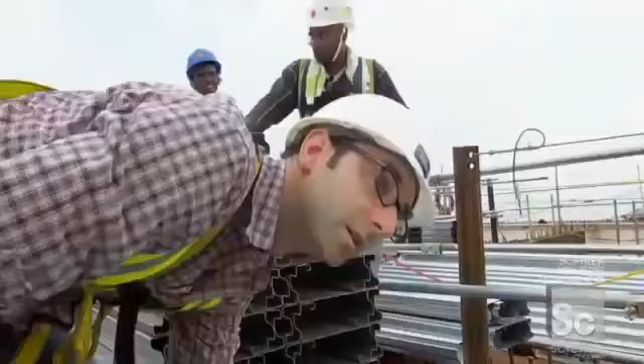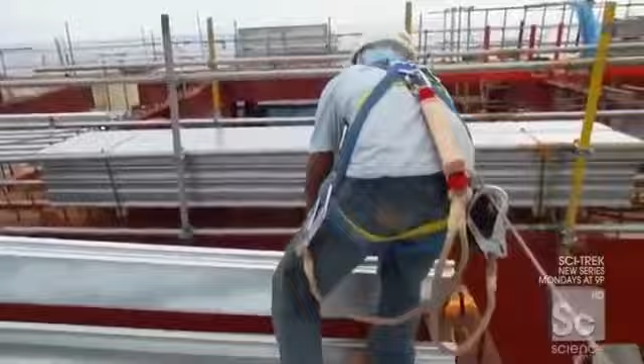All right, Wilson, how do we begin? Step 1? Okay, you ready? 1, 2, 3. And slow in. Pull back. Good. Put the clip on. Nice. Wilson, next piece. Plugging up the hole. Dear God. Okay, letting go. With these 10 panels in place, another 125 square foot section of this Sky Park deck is complete. Last piece, huh? Wilson and the rest of the crew will have to lay down 300 panels a day in order to have the entire Sky Park ready for opening day. Wilson, victory!

Wilson, when the Sky Park is done, people will be swimming right there, dancing on that cantilever, having dinner in that restaurant. Correct. But we're not done yet, are we? Come back in 6 months, check out this Sky Park.

Me and Wilson will be having a cocktail and enjoying this ridiculous, incredible view. You're buying though, right? Yeah, correct. All right, cool. Wilson's buying, so it's all good.

When the Sky Park is complete and the Marina Bay Sands opens, Singapore will join the ranks of the world's top gaming destinations and fulfill a 3-decade-long quest to reinvent a nation. You know, for me, the moment when a building actually becomes a piece of architecture is when it transcends its function. Think of the Empire State Building. It's not just about the people who work inside of it, but it's really about the spirit of New York City.

The Marina Bay Sands is a project with a hotel and a convention center and a casino. But in reality, the sum is greater than the individual parts. This is a project where an architect, an engineer, an owner, and a government have all come together to literally try and reinvent the face of a nation. And I think if you come back here in about a year's time, that postcard picture you take of Singapore is going to look a lot like that.